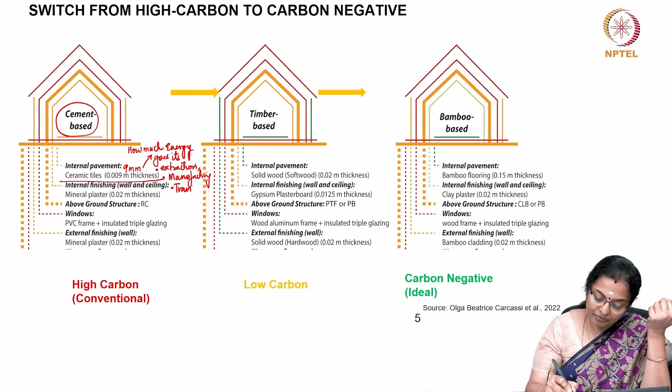In comparison to that, suppose the client is advised to go for something like a softwood, 2 centimeters of softwood.

What is the embodied energy repercussion of using 2 centimeters of solid wood?

So how much energy would go into its extraction? What is extraction here? Extraction would be to get a natural product. Wood is a natural product, but wood also has some life.

There is some more sequestration left in wood, so you need to understand what is its extraction. At this stage, its extraction is, say, felling of a tree, maybe a mature tree.

And then its manufacture, yes, it does involve some energy in its manufacturing from wood to becoming a pavement. And third is its transport.

Yes, some amount of transportation would be involved, but not to the extent of a ceramic tile, which is a high carbon material, because it may be probably transported from the next state, adjoining state, whereas the transportation of this solid wood would be within the state. Let us assume so.

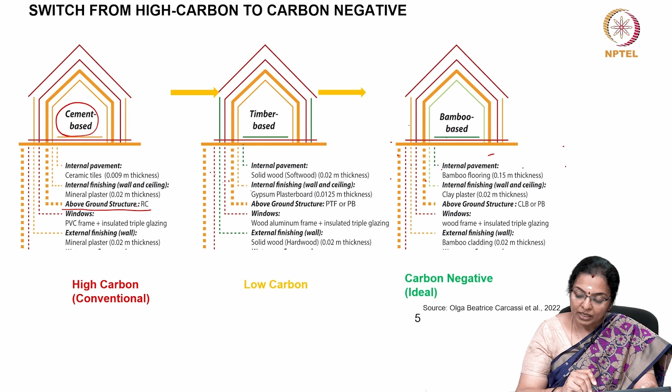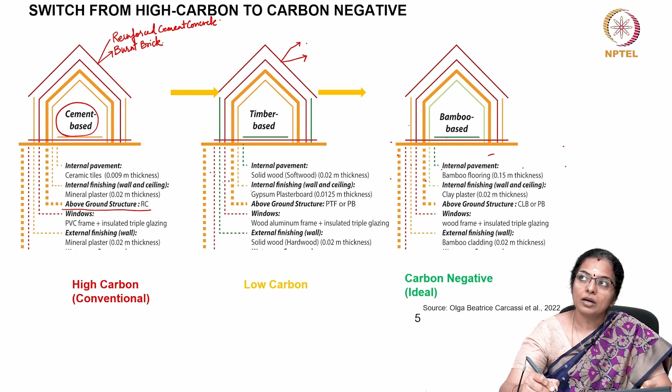Depending on whichever masonry structure you want, suppose in a cement based building, I am just giving options, you use RCC, reinforced cement concrete, for the ceiling, and you use burnt brick. Whereas in a timber based building, you use something like a CLT for ceiling, and for the walls you could use any of the low carbon material.

Say you can use CSEB. Think for a moment. And for bamboo, I am talking only of walls and ceiling. You can have bamboo reinforced ceilings, quite used in Kerala also. And for wall, you can use bamboo itself for the wall, or you can have stabilized mud walls. You can use either.

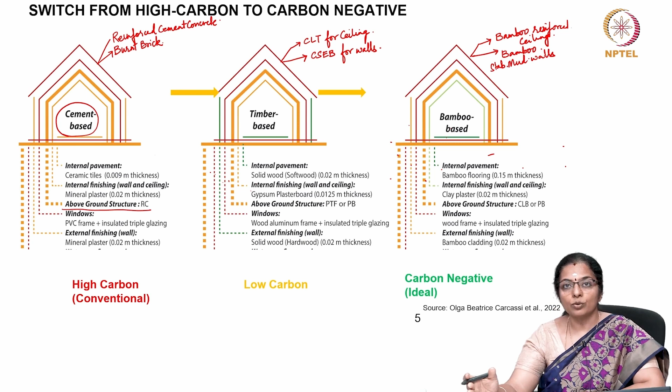So, this itself shows how much embodied energy reductions can happen when you use alternate materials to high carbon building material. By high carbon, I mean reinforced cement concrete for the roofing, burnt brick for the wall, and for low carbon you can go for compressed stabilized earth blocks for the walls.

Then you can use cross laminated timber for ceilings, and for a bamboo building, if you use bamboo reinforced ceiling or bamboo walls or stabilized mud walls or unstabilized mud walls, then it will make so much difference to the carbon emissions and you will get a carbon negative building.

The other important component which I wanted to talk about was windows and doors, which we tend to avoid addressing, but that is also a very energy consuming thing. Suppose you have a PVC frame and insulated triple glazing. See, PVC is a very synthetic material and a humongous amount of energy is required in its extraction and manufacture. Insulated triple glazing involves a lot of glass, as well as the manufacturing process is also very energy intensive.

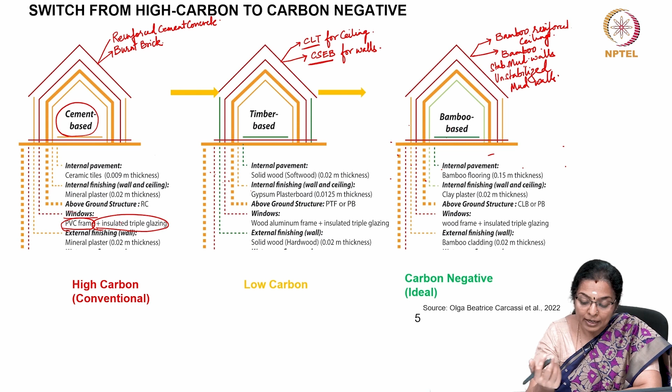Whereas in a low carbon building, you could choose to have a wood aluminum frame, a combination of wood and aluminum, and insulated triple glazing. Whereas in a bamboo based building, just wood frames would do, and there is no need even for glazing. You can avoid this glazing and have timber or bamboo windows, leading us to carbon negative.

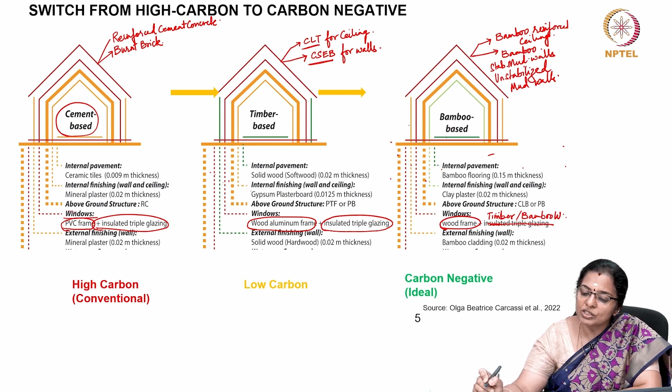So, just our choice of building materials is so important in making a building either high carbon, which is the conventional way of material selection and construction, or low carbon, which is finding some clientele in a very niche area, or carbon negative, which is the most ideal situation, and this is what the world needs today if we need to meet our emission goals.

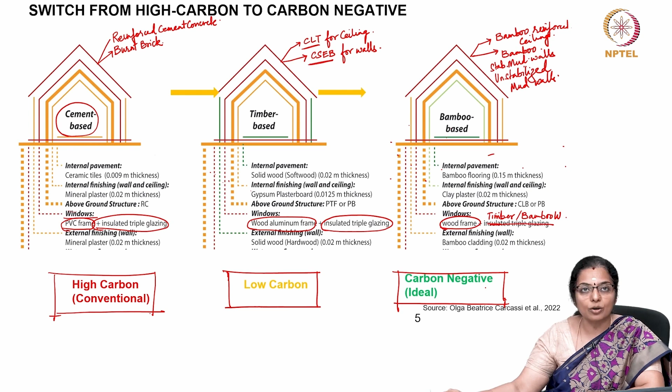So, we need to shift slowly. So, this shift is very important. Just to give you perspective, let us look at the embodied carbon of some of the insulation materials.

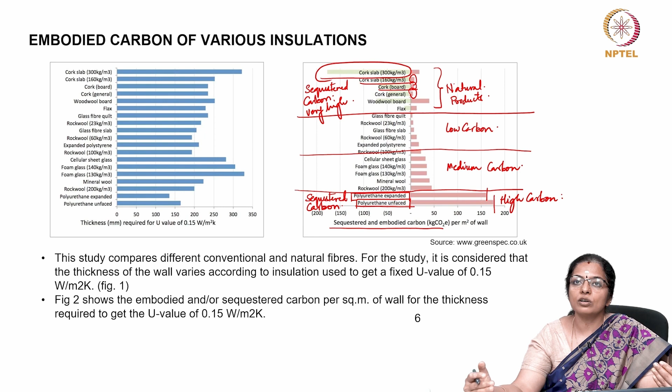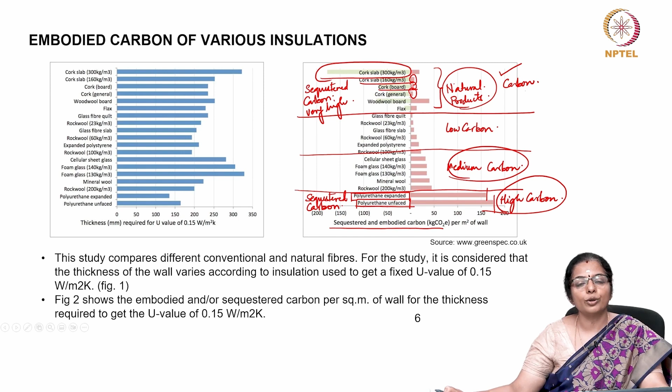What I am trying to say is, to achieve the same impact in terms of indoor thermal performance, our choice of building materials for just one item, which is insulation, can have so much of impact on the environment because of the amount of embodied energy it holds. These are choices which you will have to make very early in your design along with your client. So sitting with the client and going for natural products, the point being, even if you have to maintain after some time, the embodied energy for maintenance is not going to be too high. But if you have to maintain high carbon or medium carbon, the embodied energy is going to be very high. And the bonus of natural products is that you still have a lot of carbon sequestered. And therefore, I keep reiterating that it is very important to have the appropriate building material choice.

Now, I would just like to give you a perspective about what happens when you start using recycled materials. Aluminum is the most recyclable and the most recycled material in use today. Aluminum has very high initial embodied energy, in fact it's one of the highest. But if you are using recycled aluminum, that's the least you can do for the material choice you have made. Now you see, for reprocessing, the energy savings is very high when you use aluminum as compared to steel, and for glass the embodied energy savings is very less. We will come to this graph a little later.

But let us understand some basics: aluminum recycling involves remelting the metal, which is cheaper and more energy efficient than its production from raw bauxite, which is done through electrolysis of aluminum oxide. Already in the previous class, we have discussed how aluminum is extracted. Bauxite is found in virgin forests, and therefore to extract aluminum means that you will have to destroy some forest area. You may go for replantation, that's a different thing, but first a part of the ecosystem is destroyed. Whereas if you recycle the aluminum, the process of having to destroy the forest land can be avoided. And therefore, its recycling is a much better option if you have decided to use aluminum.

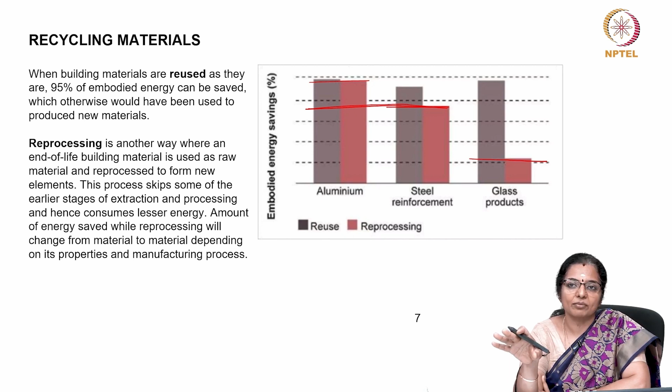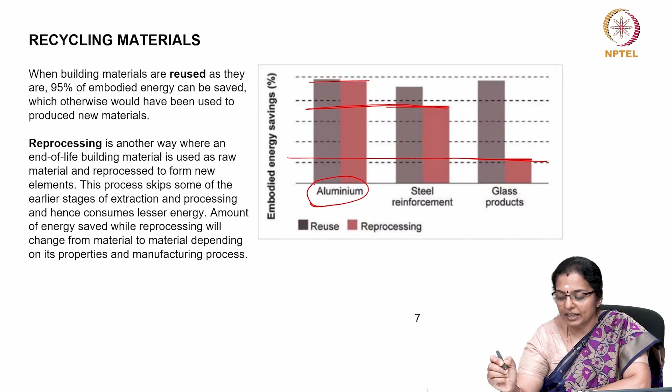The major source of embodied carbon in glass is the energy to heat the furnace to melt the raw materials. Now, this process anyway has to be carried out even while recycling. Hence, recycling of glass does not save as much embodied energy as aluminum or steel, as you can see from this graph. Therefore, if you want to consider a recycled material, aluminum is a much better choice as compared to glass or as compared to steel.

We will quickly see materials with carbon sequestering properties, because I had been talking multiple times about carbon sequestration when we were discussing the use of cork products. So, carbon sequestration is the process of capturing and storing atmospheric carbon dioxide. It is an inherent property of the material because it contains biomass. The carbon is not yet released from the material, but it is held in the material itself, and therefore all natural products will have carbon sequestered in them.

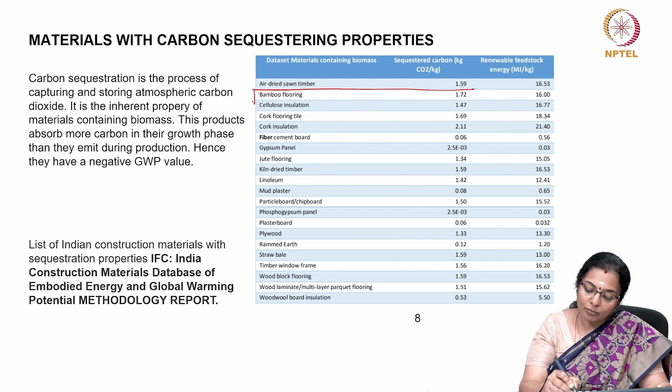These products absorb more carbon dioxide in their growing phase than they emit during production. Therefore, it is assumed that these products have a negative global warming potential value. Here I have shown some materials which have sequestered carbon, and what is their renewable feedstock energy. You can see air dried sawn timber or bamboo flooring has very high sequestered carbon, which means it consumes more carbon in its growth phase and holds more carbon than the carbon that is needed to make it into any product, and you can notice it is a natural product.

So, even amongst natural products, bamboo seems to have a very high sequestered carbon, as much as timber. We can well imagine that timber also has more carbon in it, and again you can see all cork products have large amounts of carbon sequestered in them. If you look at any of the natural products, whether it is straw bale or timber or any wood based product, you can see that the carbon sequestration is high in them. The carbon sequestration is in the range of 1.5 to 1.75 kg carbon dioxide per kg of the product.

If you look at products which need some kind of manufacturing, say fiber cement board, you can see carbon sequestration is almost 0, it is 0.06. Whatever little carbon sequestration happens is because of the natural fiber that is used as an additive in the cement board. Otherwise, it would definitely have no carbon sequestered in it. So this gives us a perspective about what materials have more carbon sequestered and therefore are kinder to the environment and support decarbonization by having reduced embodied carbon emissions. They are all made up of natural fibers, or they all have some natural material in them.

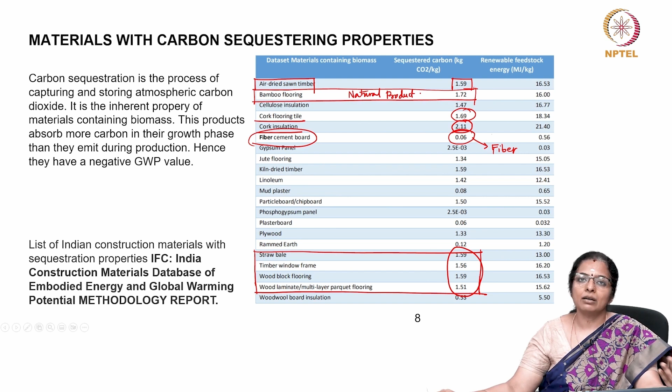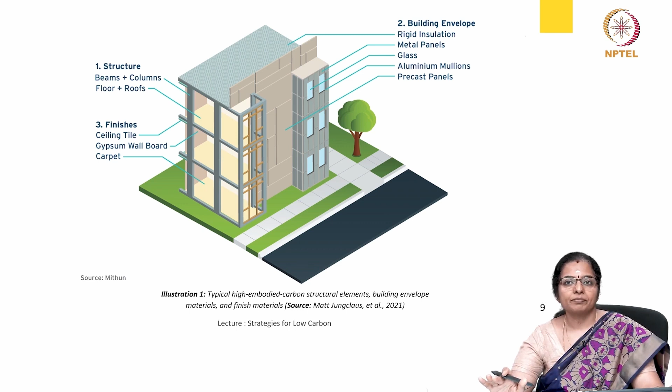Another thing we have to be careful about is which component consumes most of the embodied carbon. Based on that, we can decide on an alternative building material for that particular component in such a way that the embodied carbon will be reduced. We already know that embodied carbon emissions are associated with materials and construction process through the whole life cycle of the building, not only at the initial stage. Now, our choice of low carbon materials becomes important because there are certain components in the building which can hold a lot of embodied carbon, and therefore we need to identify these.

That is where the early design stage is important. Catch it young. At an early design stage, make your decisions about what building materials you want to use, how you want to manufacture, or rather from which place you want to bring those building materials. Those decisions become very important in ensuring that we have a low embodied carbon building. And that was our topic today, and this will be one of the important ways to reduce embodied carbon in buildings.

So, I will leave you with this, the gist of this: we have seen how our choices of building materials will result in either a high embodied carbon building, or a low carbon building, or a negative carbon building, an extremely green building. And these choices are definitely in the hands of the architects and designers, taking the client into confidence.